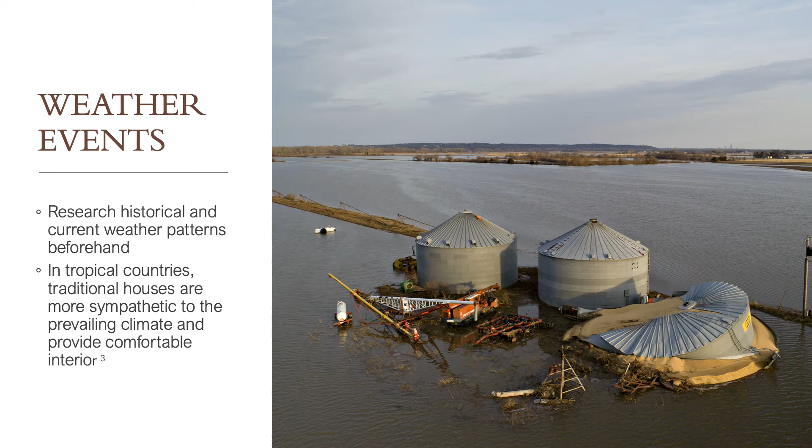Additionally, it is important to consider pollution and the environmental footprint a project could create. If we import materials from outside the region, there is more transportation time and fuel burned. Locally sourced materials may have the advantage of taking advantage of abundant unused resources around the local region, for example using mud as bricks and insulators.

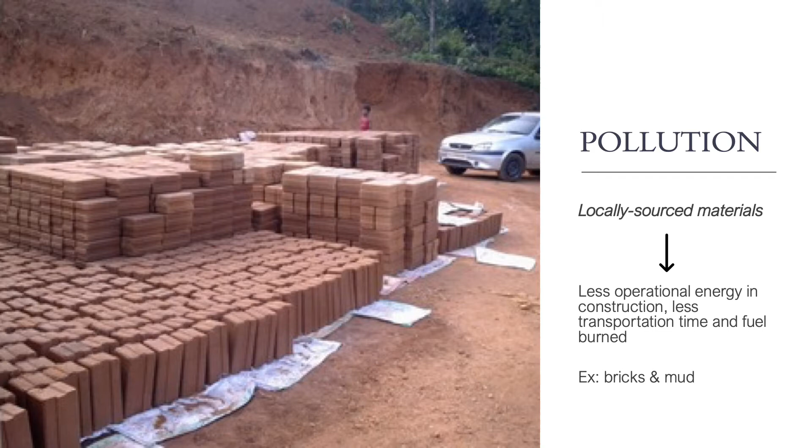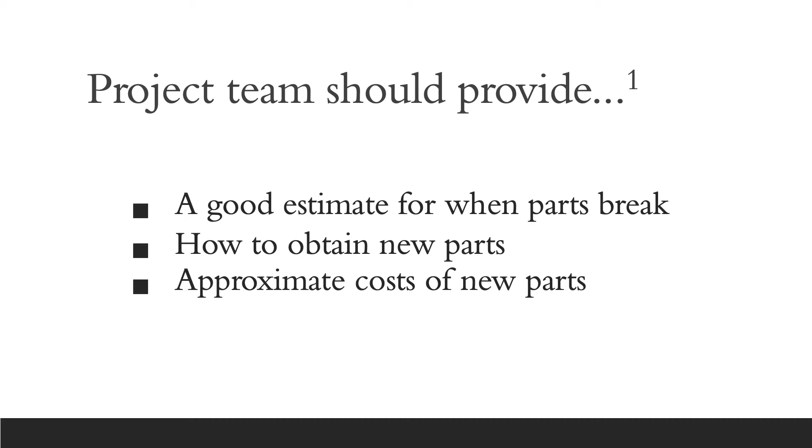This makes sense, since if a community cannot afford to maintain a project that EWB helps set up, the project will not last too long. That's why an EWB document on water sustainability from Volunteer Village claims that a project team should provide three things for the community: a good estimate for when parts break, how to obtain new parts, and the approximate cost of new parts.

Most housing developers insist on the use of conventional building materials and technologies, usually due to government regulations. These standards and regulations prevent the use of readily available local building materials that may also be cost-effective and environmentally friendly. On the contrary, however, countries with more relaxed regulations may also have lower quality materials.

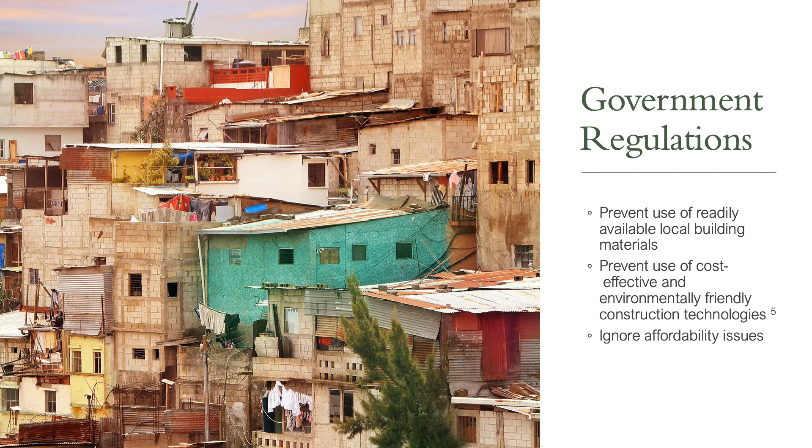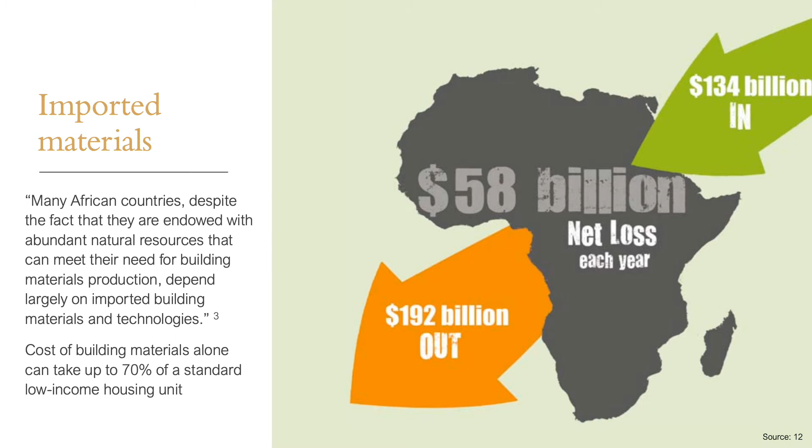As we see in the diagram on the right, Africa loses $58 billion each year. A portion of that is due to the fact that many African countries, despite being endowed with abundant natural resources that could meet their need for building materials production, depend largely on imported building materials and technologies. Building materials can make up to 70% of the cost of building a housing unit.

Lastly, let's look at some of the social factors that should impact our material selection for our projects. EWB-USA guidelines say that projects where the community has a strong sense of ownership will be much more likely to be sustainable into the future.

This should be our main goal for our EWB projects: that the community will have some sort of investment in the project and will have more incentive to operate and maintain it in the long run. Community ownership can look like a cash contribution to the project costs, the provision of labor and local materials, and helping in the selection of the technology used.

There is a direct correlation between the lack of this community ownership and neglect of maintenance and repairs. This means, if we want a project to be sustainable, it is vital for the project to be managed by a village community of some sort, so they feel a sense of ownership and empowerment with the project.

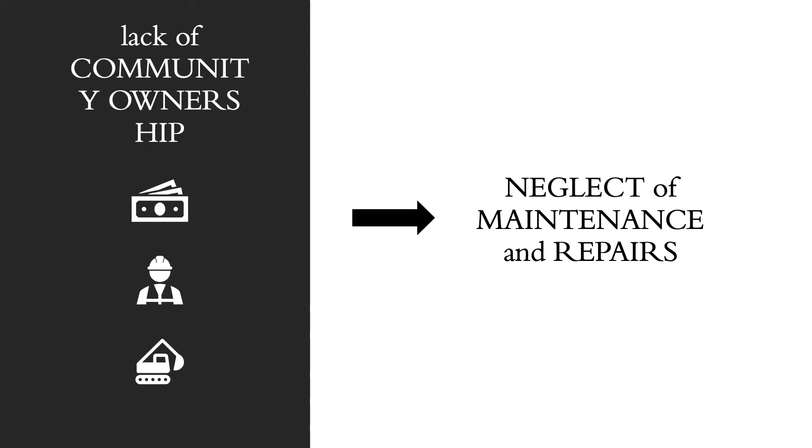If not, the community could start to be less invested in the project, and it will fail, as many have over time. Additionally, materials such as timber and straw have been labeled as primitive and stigmatized against using them. As a result, materials that could have many benefits, such as being local, cheap, and abundant, are neglected as viable options.

In an ideal situation, when designing a project and selecting materials, we can have material that is local, cheap, and available, while also durable and high quality, with little environmental negative impact and social acceptance within the community. One example is the use of bamboo scaffolding in Hong Kong, which is local to the area as well as very effective. However, usually we cannot have it all, and therefore have to make trade-offs.

We want to give some examples of how to choose materials based on the factors we discussed for our chapter's EWB projects.

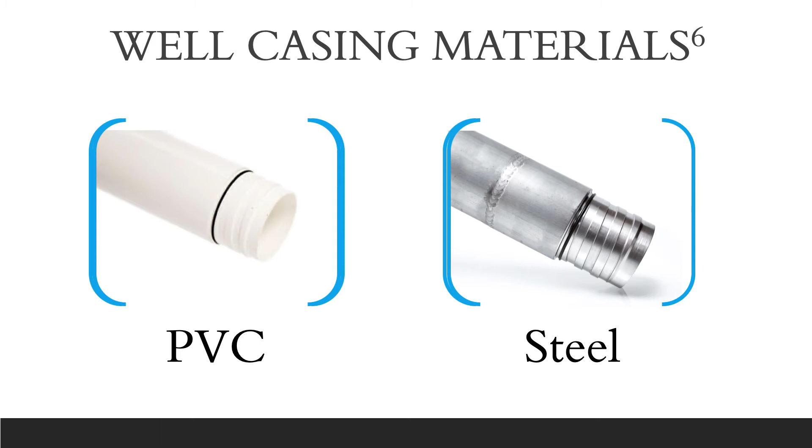First off, for well casing materials, we have been deciding between PVC piping or steel. Looking at the economic and social factors, we see that PVC pipe is a good option since it is easy to work with, is lightweight, and commonly available in country, making it easier for communities to work with and therefore be more involved in the project.

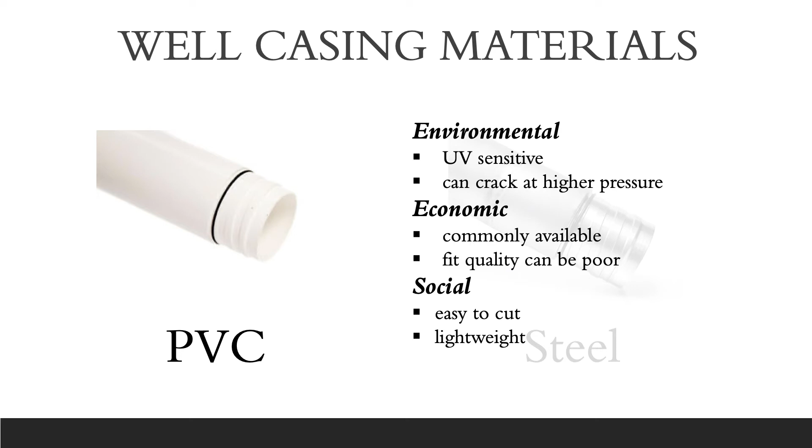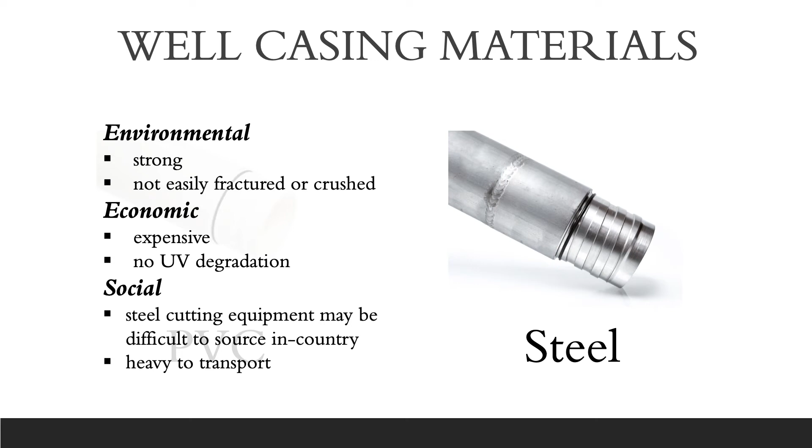However, in terms of environmental factors, it is UV sensitive and will require a UV resistant paint covering and can crack at higher pressure. Steel piping, on the other hand, may be able to withstand temperate weather better since it is a stronger material and will have no UV degradation. However, it is more expensive, harder to work with without proper cutting equipment, and heavier to transport, making it a material that may be less sustainable in the long run with keeping community involvement in mind.

We want to quickly point out that there is no right or wrong answer in material selection like this. EWB's regulations on well casing material, for instance, say either steel or PVC can be chosen, since both have their advantages and disadvantages. They say the choice of materials is largely dependent on what is available locally and what the contractor is most comfortable working with, as long as the materials are resistant to corrosion and collapse of the borehole. So we can see that it really is up to us, in the end, but it's important to keep in mind all the factors we discussed.

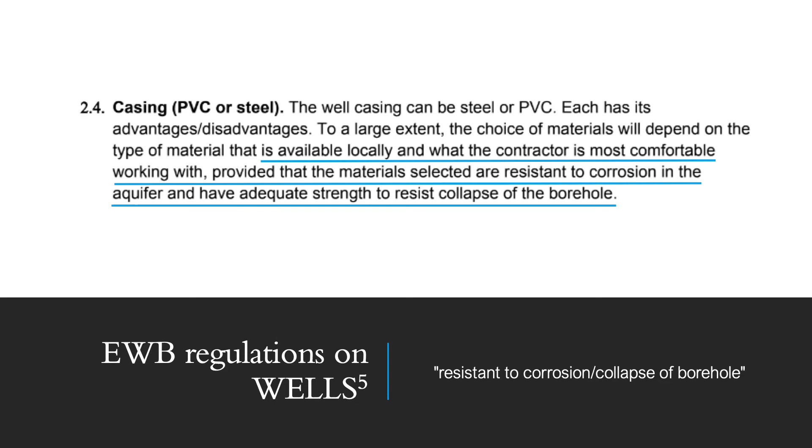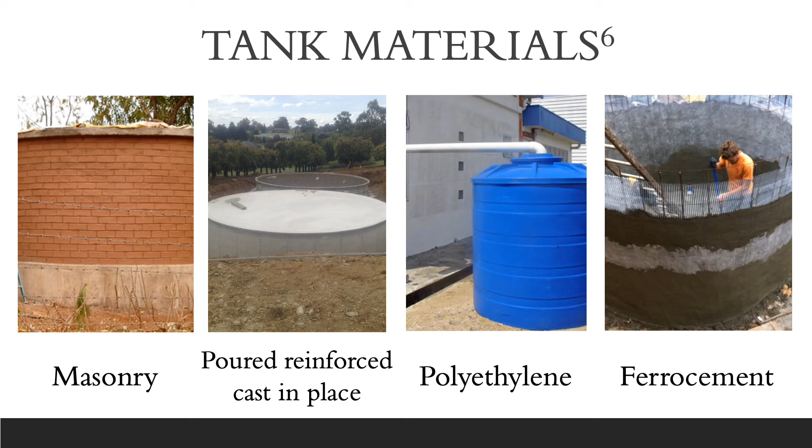Our chapter's projects have also included water tank material selection. These are 4 options we've had to consider: masonry, poured concrete, prefabricated, and ferrocement tanks.

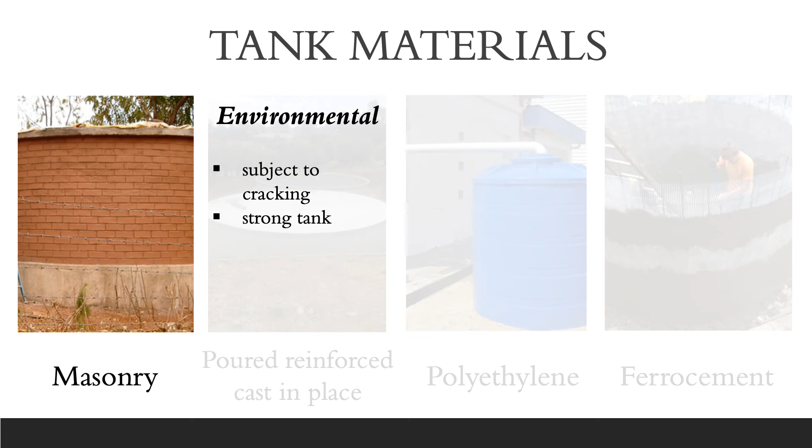The masonry option is a strong tank that may be able to withstand harsh weather events, although it is subject to cracking, which will require some community maintenance. But since materials are available locally and most communities have the skill and knowledge to help construct and maintain a masonry tank, it is sustainable in a community involvement sense.

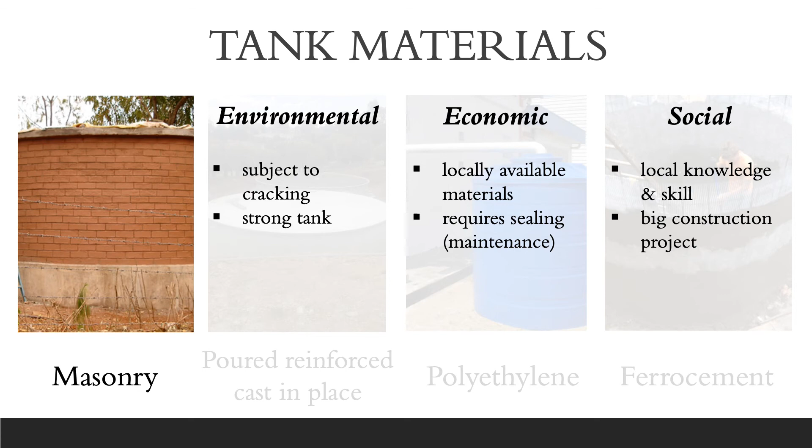Similarly, a poured concrete tank is a strong option, but may require more skilled workers and higher concrete quality.

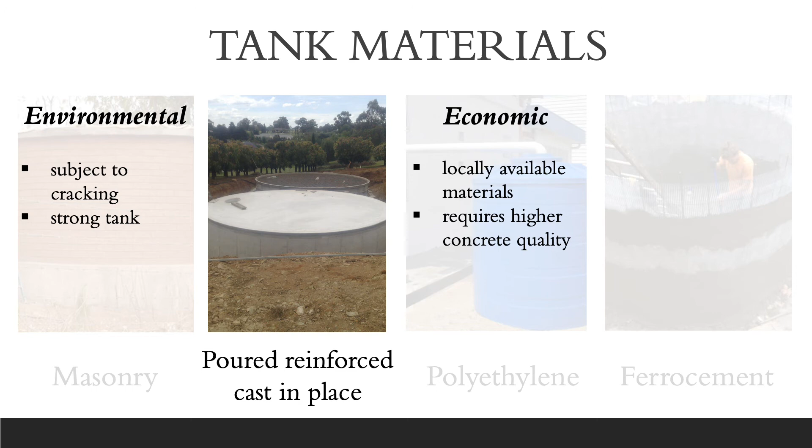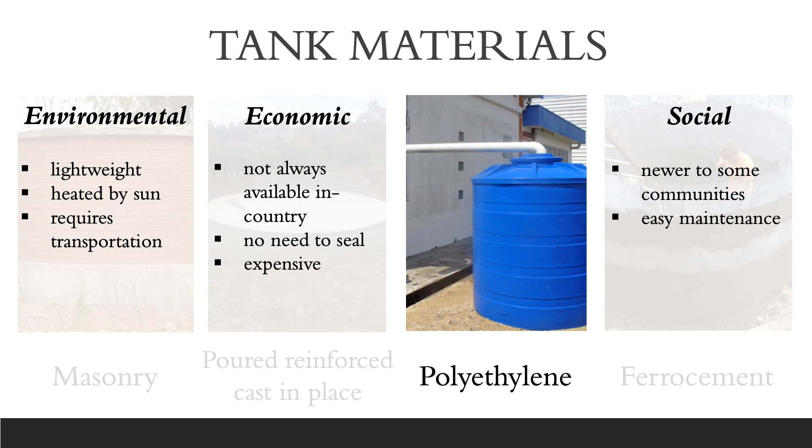A prefabricated tank will have more environmental problems since it is lightweight and can be blown away, and will be more affected by UV rays. It is also not always available in country and is not as well known as a tank material, which may affect community involvement. However, it is a pretty easy tank to maintain once it's set up.

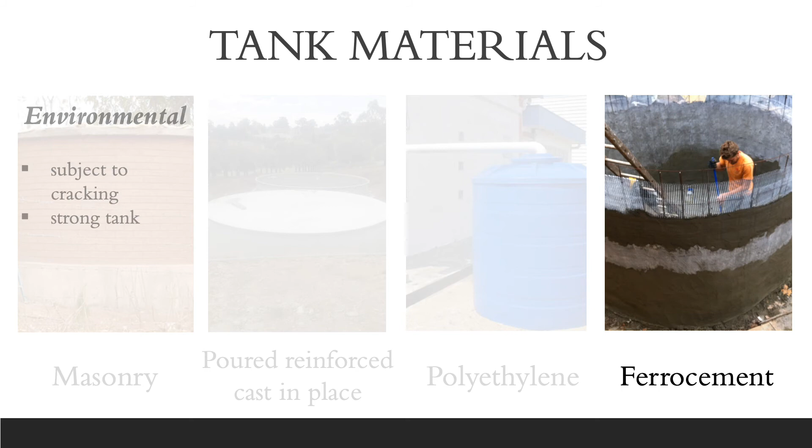A ferrocement tank is similar to a poured concrete and masonry tank in that it's strong but could crack, which would require maintenance and possibly more skilled workers.

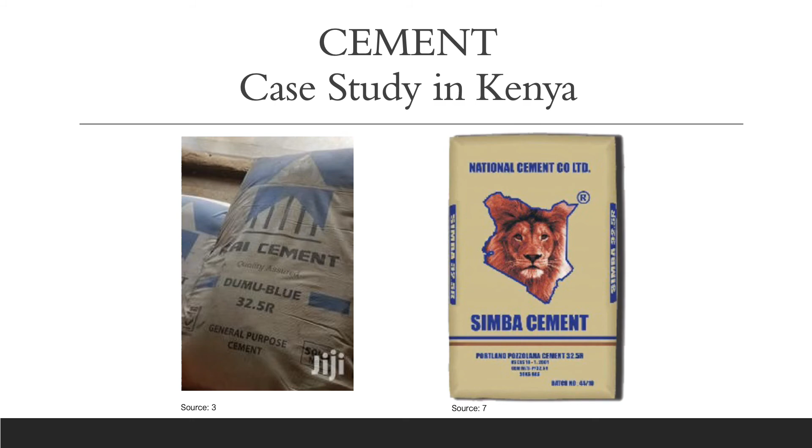While cement is used in practically every project, we will focus on what is available in Kenya. We will specifically look at ready mixed versus site mixed cement.

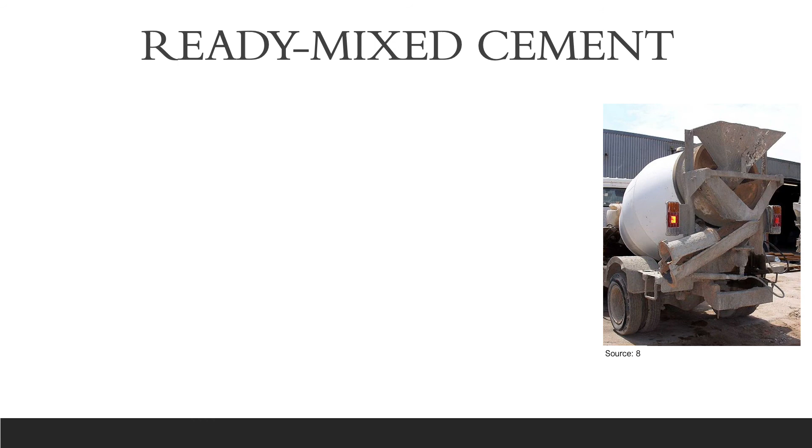For ready mixed cement, benefits can include the fact that it's made in a more controlled environment and therefore has more uniform quality. However, it is more costly as well as can be socially detrimental to the community since an outside company comes in and takes over the project, taking away community ownership.

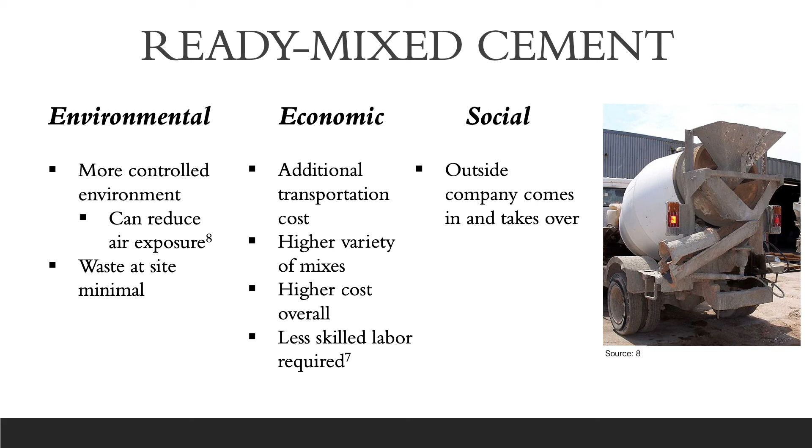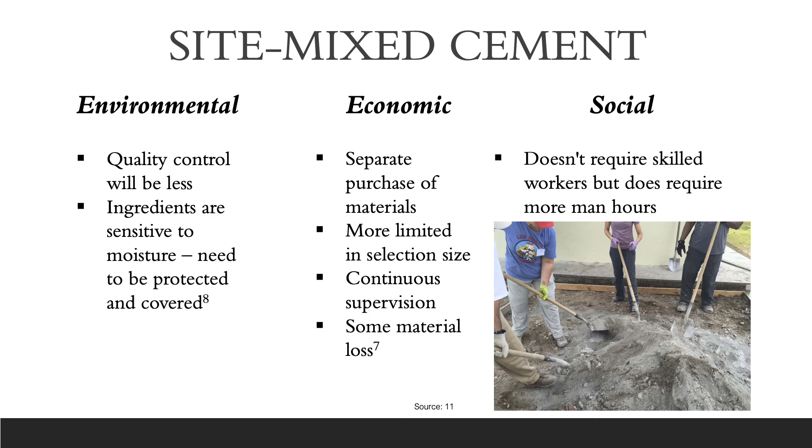Near Kibon, we found 2 cement brands, Simba Cement and DumuBlue Cement. However, it was noted that Simba only has 2 strengths of cement, which is not a lot of variation. Additionally, those strengths were on the higher side, meaning they are more expensive.

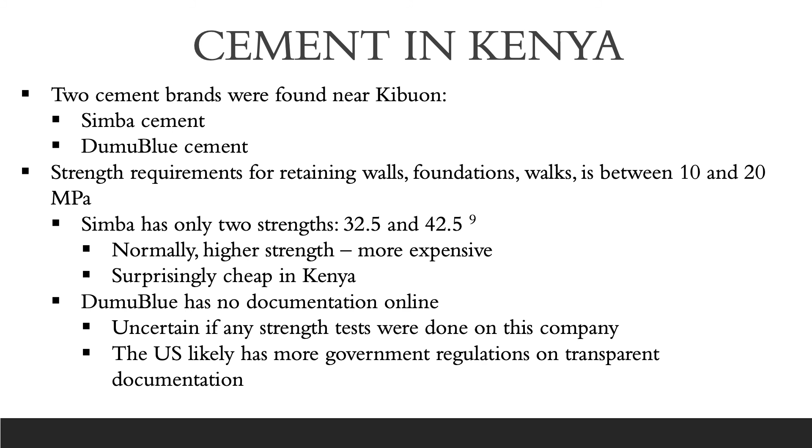While in Kenya, cement is surprisingly cheap due to a sudden change in the economy a few years ago, in most countries that is something to consider when debating about buying locally or importing from elsewhere. Additionally, DumuBlue has no documentation online, which makes us uncertain about the quality of the cement and might make us wary of buying it.

In summary, it is evident that in choosing what materials to use for our EWB projects, it is so important to keep in mind all the economic, environmental, and social factors in sustainability. Again, there aren't any right or wrong answers to this, as long as each decision is well thought out. For instance, even though a chosen material may be newer to a community, with the proper training and a detailed O&M manual, the material can end up being more sustainable in the long run.